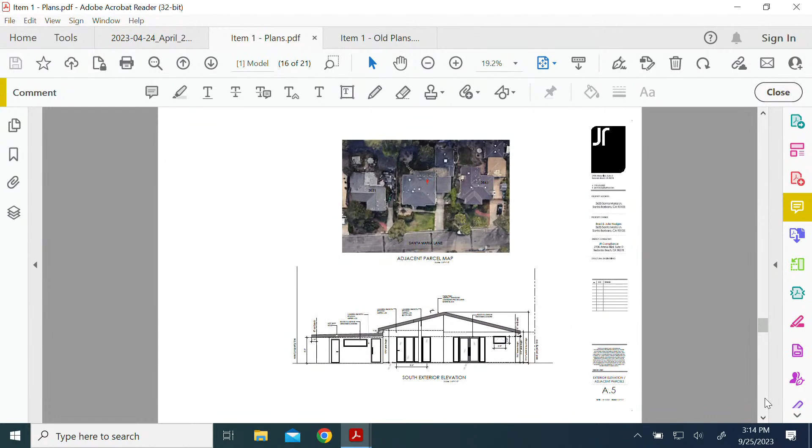And then we also cleaned up the windows on both west and east projections. I think we removed one window and lined them up a little bit better on the east elevation. And on the west elevation, there was 5 thin windows all right next to each other. In the initial design, we changed it to those 2 windows that you see now. That other window is the window across the front, that's the return of your front entry, just up to the left of the entry. That's the window over on this side right here.

So that's basically, oh, and then the projections, so here's how it projects out in the neighborhood. The 2 neighbors on each side are 4:12 roof pitches. Our roof pitch is 3:12. So our plate heights are a little higher, but it's sort of offset a bit by the lower pitch.

Now I can't read it. She may have put in there estimated what the crest is, or the peak of the roof. But it's within a foot, I think, of either house on the right, maybe a foot and a half. I can't really read it from here. Is it possible to zoom in? Up at the top, there's a...

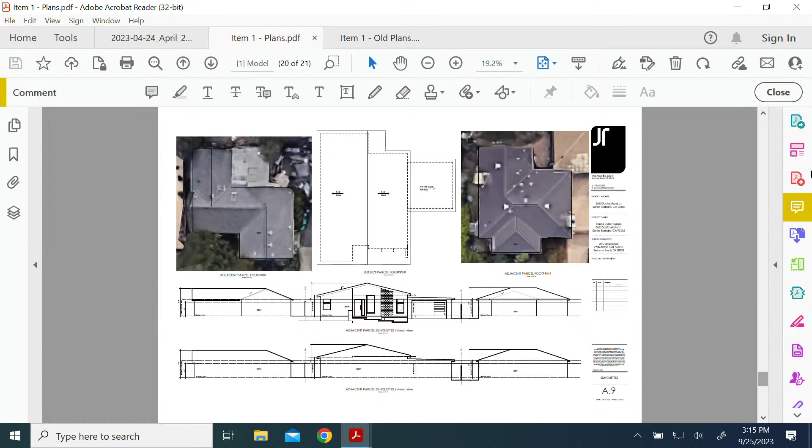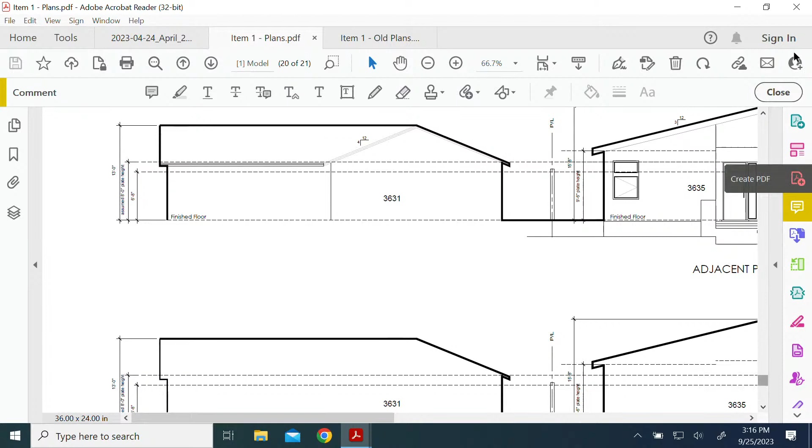Let's see, that's 15.5. Our ridge line is 15.5. And the neighbors, she's got it at 13.7, no, 12, 13 feet. So we're about, and it's based on the assumed 8 feet ceiling or plate height for the neighbors. We just assumed that the plate height was 8 feet on those houses.

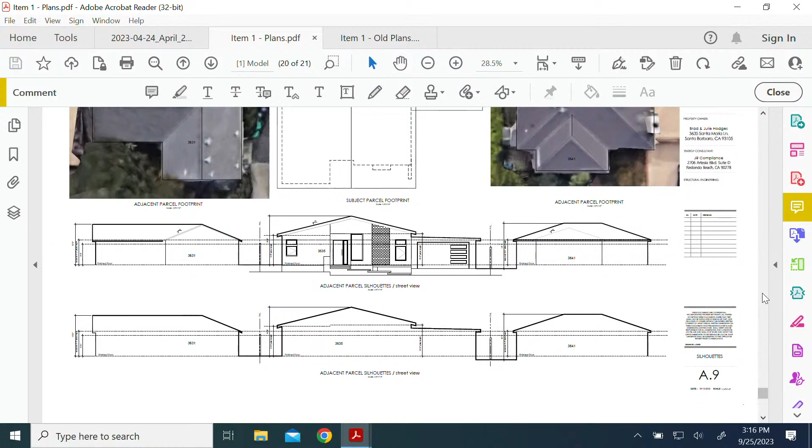Okay. So, and now some other differences, I don't know if it matters, but we did do one other little thing, which was we knocked a notch out of the back corner of this garage to accommodate the AC condenser and kept it 6 feet back, which gave us our acoustical noise levels to meet the decibel levels at the property line. So that 6 foot, and we chose a unit, and that 6 foot just put us right at the, whatever it was, I think 53 or 52.

Okay, other than that, that's about the only changes. We changed the stucco color. Oh, yeah, and here's we put the stucco color in there, but it doesn't present like this, so this is the more accurate. I call it like a dirty oatmeal, or it's more white. The other one was called Dove Gray, but it was a very white with a hint of blue, I think, maybe blue gray. And what is this color, do you know?

Do you know what this color name is, or is it documented in the drawings? It's documented in the drawings. It's La Habra Aspen, X23 Aspen. But that's called out right down here in the plan. Okay, and I believe that's it.

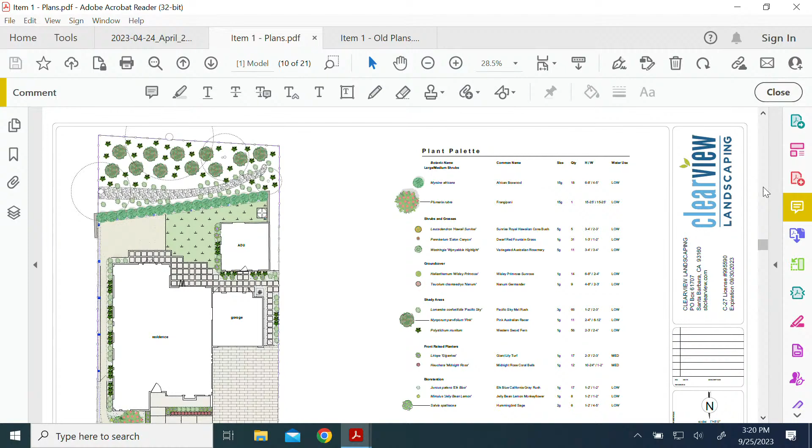Is it on the other page? It's on there, yeah. Gina called it out on there, one of those pages. There we go. I can't read it, but looks like there's a note there on the right, maybe.

GraniteCrete, there you go. GraniteCrete permeable paving. So anything that's not that permeable paver is gravel.

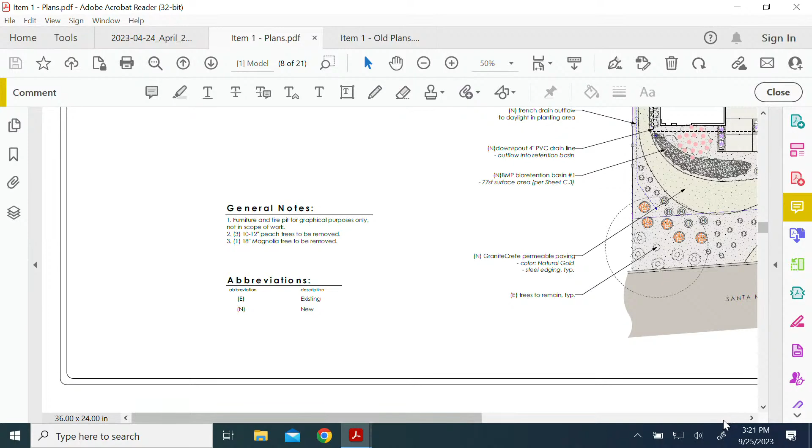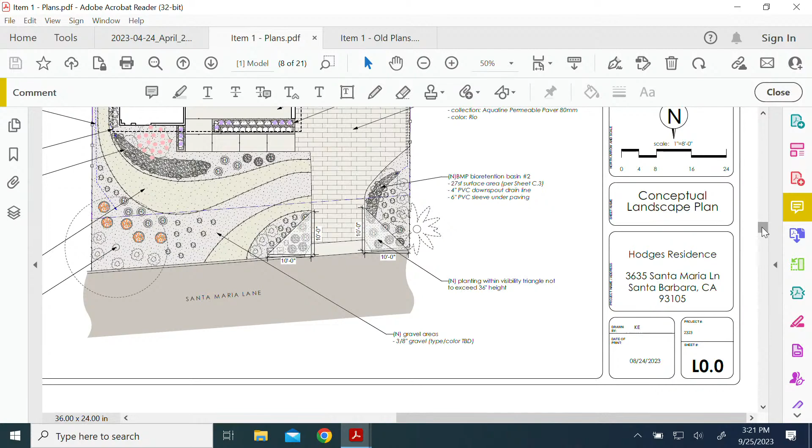There's also a large magnolia in the back, right about here. You can see the slope back here, this is a fairly large slope, and it's covered with one very large, very healthy native oak. It shades a lot, throws a lot of shade under this backyard, and that poor magnolia just never did very well. It's kind of sparsely limbed and doesn't look like a typical magnolia at all. So that comes out.

There's just a simple seating area in the back. This is all that granitecrete again.

Is there any lighting proposed in the exterior landscape? No, not at this time. There's going to be a light in the front somewhere, but we haven't spec'd anything out, we haven't placed it. I'm guessing it'll be somewhere in the front. There will be at least one light, maybe 2 lights to balance out on one side or the other of this front pseudo fireplace projection thing. We were told that we can identify those in building, so I don't know.

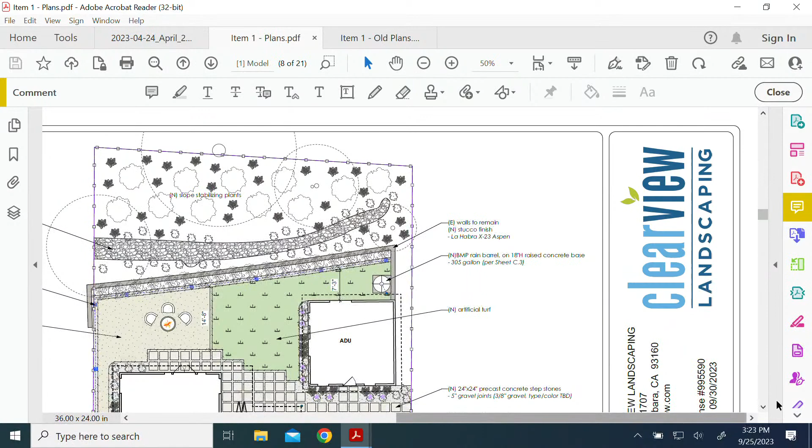I think I don't have anything to, I can't think of anything. I'm sure there's something we changed and I just don't remember it. It's been a while since we've been in here.

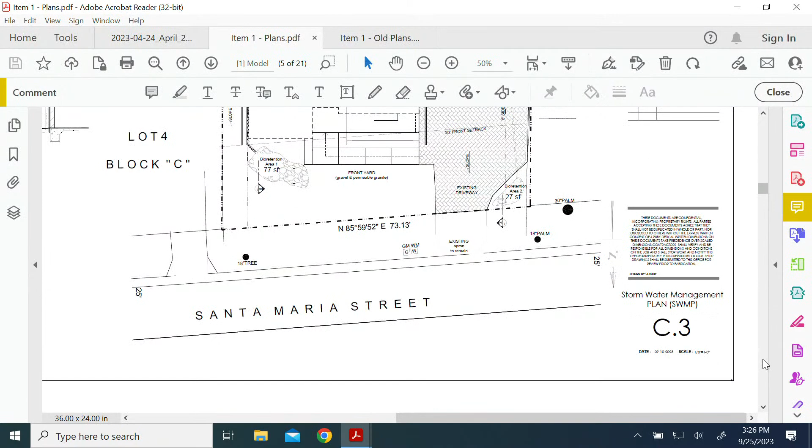They're different because we shifted the center line. The original elevation actually was the page I wanted you to find. It has to do with keeping the original footprint of the house and where the beam goes. The addition has a different plate height, while the existing finished floor keeps the same plate height it is now. We kept the footprint of the house, so we're building on the footprint, and that's where the beam is.

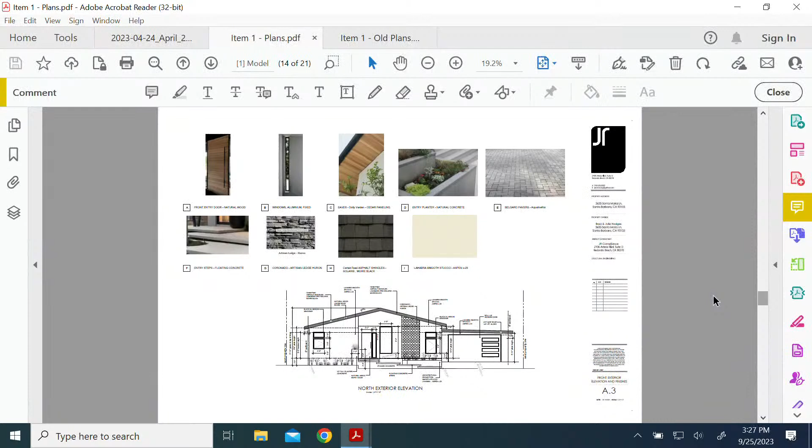But the reason they are different—actually, can you zoom in on that elevation? It's hard to read the numbers. That's what I wanted to see.

Yeah, that's good, the roof. So it's 10 feet on the west and 9.6 on the east—I think she doesn't call them out too well. If you look at the dashed line indicating the finished floor, it's the same all the way through the house. So it's the fact that the ridge line is off-center. Oh, is that why? Yeah. So the ridge line was shifted to the right to line up better with the interior floor plan, and that brought up the right side as the ridge line shifted. I think the old ridge line was roughly at the edge of the door.

And then the other question I had, just out of curiosity, was why you raised the header on the window to the right of the front door. It just looked a little weak when it was lined up—a little underwhelming on the front elevation. We were trying to tone it down, and that toned it down too much. And when we looked at the interior modeling, it was just a better look. It made this part of the house a little more dramatic for us.

Thank you, that's it. Okay, anybody else with any questions? I have some questions. Okay, hi Ms. Anderson, thank you for coming back.

I reviewed where we were at the last couple of times, and I think there was a comment on the roof lines. Our biggest challenge is neighborhood compatibility with your project, which I believe is mid-century modern, is that correct? Okay, right. We're in an existing single-story ranch neighborhood, and your immediate neighborhood is single-story with a lot of hip roofs. So our challenge is finding that this project is compatible with the existing neighborhood and how the character changes. We asked you to look at different roof slopes, potential hips or roof lines. Were there any further studies on the roof lines from the previous submittals?

No, well, we changed it drastically, if you recall the first one. Yeah, the first one was really wild—more of a flat roof with a pitch in the middle. So we completely changed that to accommodate and be more compatible with the neighborhood. We feel that's very compatible now.

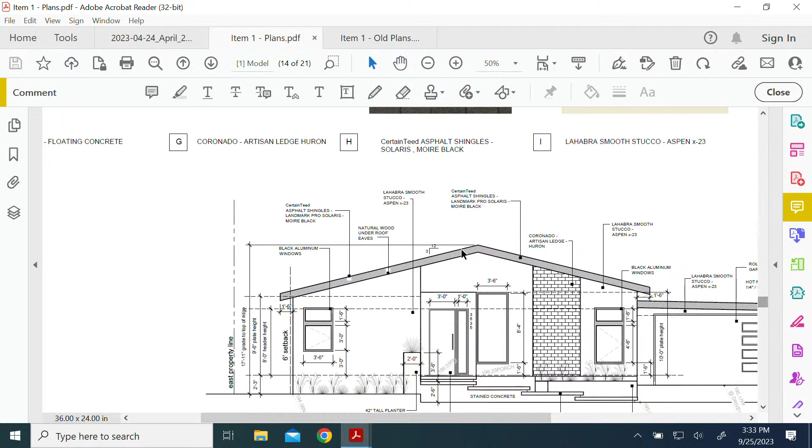The fascias and window trim will be standard black, the Fleetwood black color, matching the window trim. We're going to match that to the fascia pieces, which are metal. Then there's the stucco color, but we could do a 3D rendering. I don't know if you'd be able to spin it, but we can probably snapshot a couple of our scenes to see what it looks like from a few angles. Yeah, we can do that.

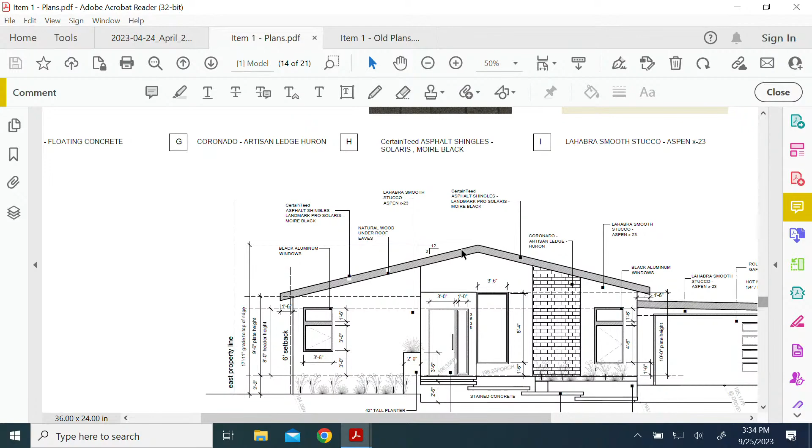Okay, I was just asking—the Coronado ledge stone on the front fireplace, is that a manufactured or a natural stone? That's Coronado stone right now, which is manufactured. It's pretty common, you see it a lot.

We actually have a designer who would really like to upgrade that, but we decided we'd cross that bridge during building if we have to—we could sit down and rethink exactly what we want there. She wants the same material on the inside as the outside, which kind of rules out the Coronado stone, since that's really an exterior product and wouldn't look good inside, although people do it.

We don't have any definite decisions on that yet, so as far as we know it's what we have now. We haven't changed it because we don't have a decision on the interior decoration or design yet. We just have an idea and are working on the inside—we have the major stuff like where the drop ceilings will go, but not the tiles. Interior's really not our purview, so we don't even need to discuss it, just to keep this on track.

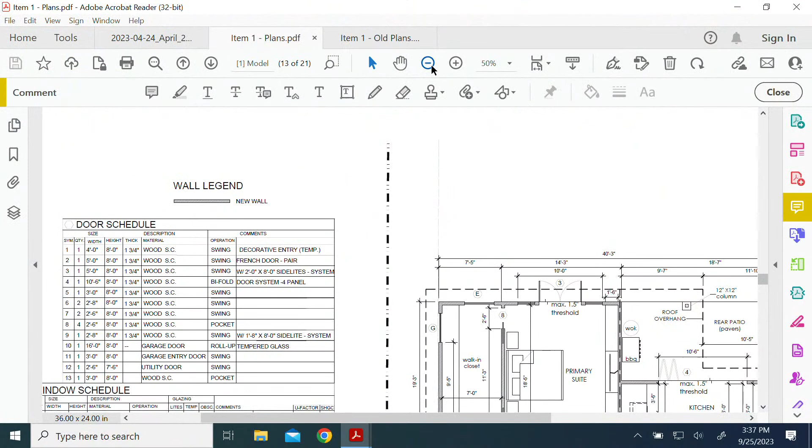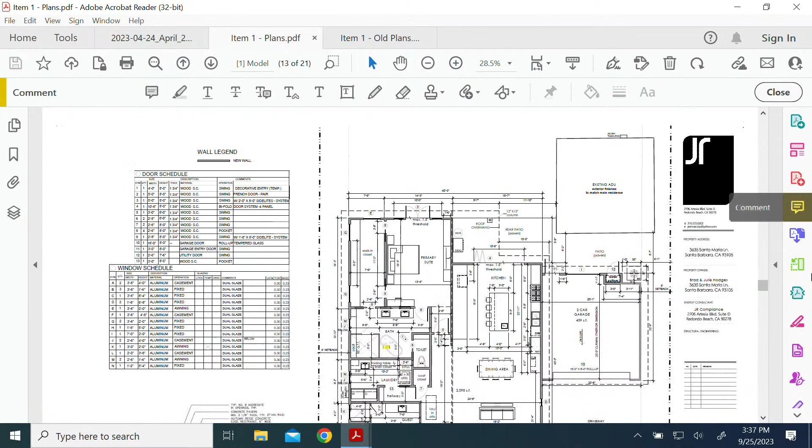I believe the front roof line encroaches in the front 20-foot setback for a certain portion - am I incorrect? It shouldn't, let's see where the setbacks are drawn, typically shown on the site plan. You can see it on the first floor plan - it looks like it covers over the porch, but not the roof line. So the flat work, right? I believe this is a line, right at the corner of the residence. The roof line comes forward of the 20-foot setback. Yeah, it does. Okay, so we don't have that noted anywhere, but okay, thank you.

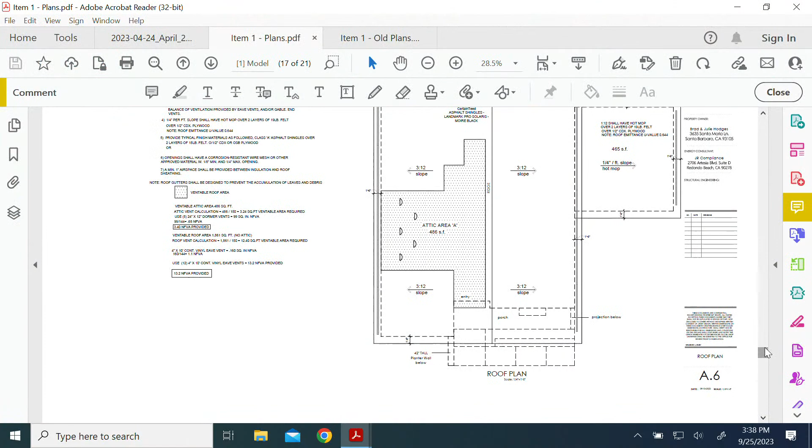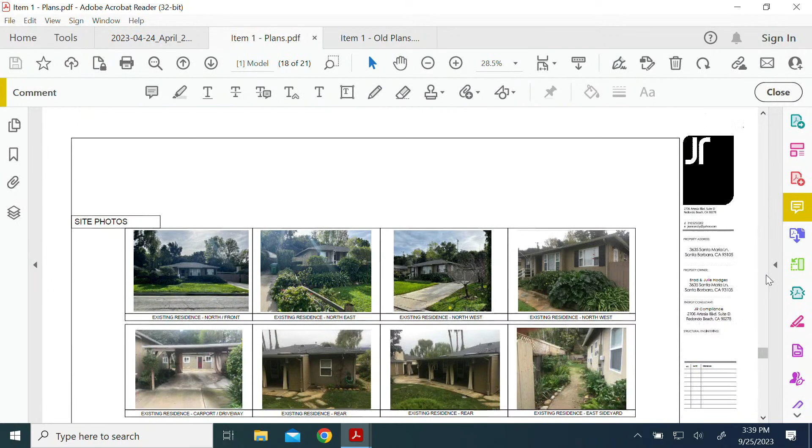Any other questions? I know there was discussion of the varying ridge lines - from my recollection, the neighbor on the west side does have a similar ridge line, so could you pull that up, I want to get clarity on whether there are similar patterns of development. That overhead aerial view might be helpful to start with, then we could go to the elevation photos. It was the one prior that showed an aerial view with 3 houses, including yours. It's on page 16. Oh, right now you're on 18 of 21. There you go.

So the home to the left looks like it has gable roofs, and the one to the right appears to have hipped roofs, and the subject parcel appears to have hipped roofs currently. Does that answer your question? I think I'm more concerned also with the front elevations, the appearance, but it's okay, it answered my question.

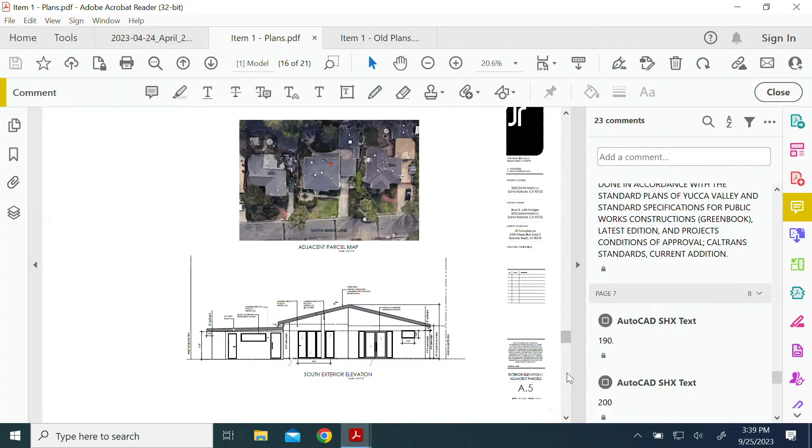Did you guys study at all the fireplace chimney coming past the roof line, or does it just go to the other side? Well, we don't have a real chimney. It's not a real chimney, it's not going to be functioning. It's just one of those electric ones - yeah, it's not a real chimney.

Okay, could we see the front photos, the context photos that you have please? I believe they're below us - those were the ones you were going to a second ago, and I derailed you onto the sheet, I'm sorry. I think if you scroll down to page 18 - there we go, could you zoom in on those? I'm more interested in the neighboring ones.

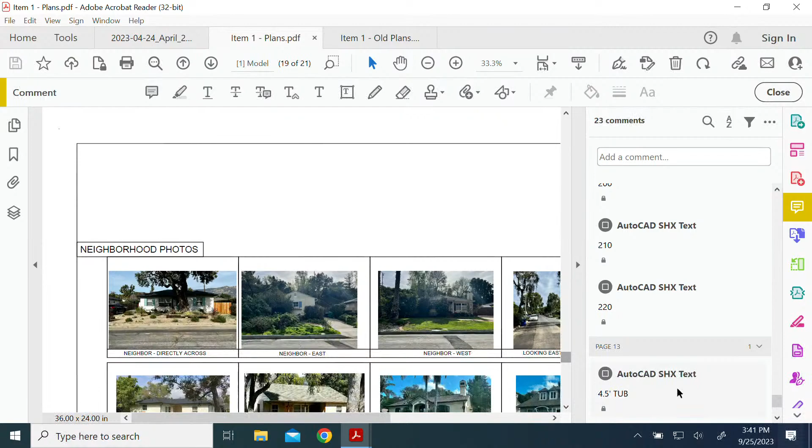If you close the comment bar on the right, that's great, thank you. And then could you point out which two are your flanking neighbors please? This is the east side neighbor. Okay, this is the west neighbor. And the east neighbor, they're working on the landscaping, so they cleared out a lot of the front, and they said they're going to really clean it up so more of the house will show.

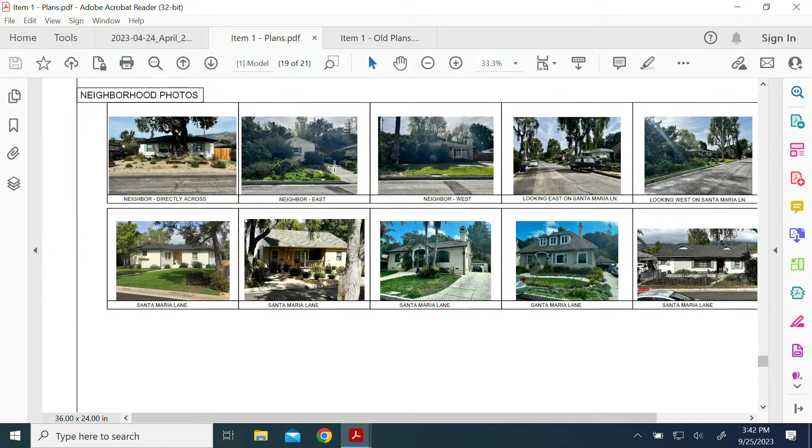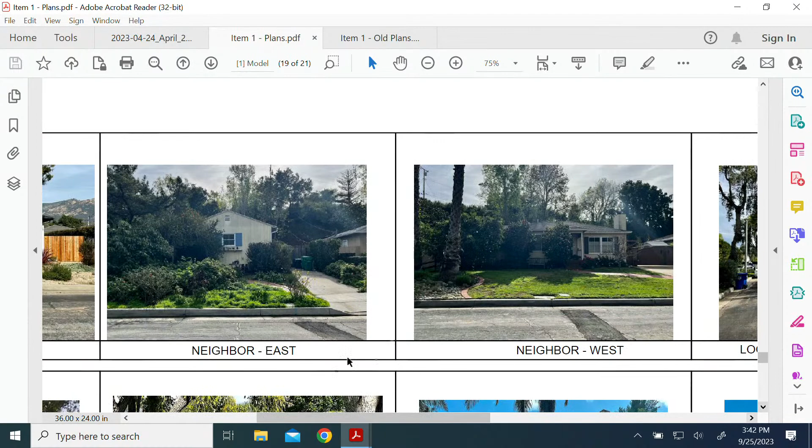And the colors of those homes, from what I'm seeing, it looks like the easterly neighbor's maybe a light gray, and the westerly neighbor has a touch of green in it. And the east neighbor, I think it's more like a light beige. Let's see if we can zoom in a little - well it looks like it might be a gray, like a taupe color, almost like black shutters.

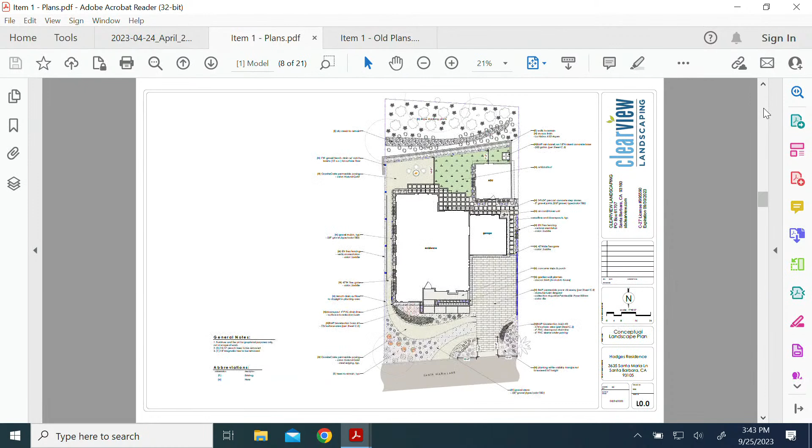That was the only significant question that I have. Except you did note that there used to be a large magnolia tree suffering in the back - has that been removed? No, we're going to apply to get it removed. Okay, and is that illustrated on the landscape plan? Because when I saw it, I didn't see anything indicating the removal of a tree, but maybe I wasn't looking at the right sheet. I think it's not indicated until you get to the site plan - it's noted on the cover sheet, 18-inch magnolia to be removed. But it's not indicated on the landscape plans? No, because we're assuming it's removed for the new landscape. So you don't have a landscape demolition plan, just a proposed plan? Right, yeah. This is the location of the magnolia.

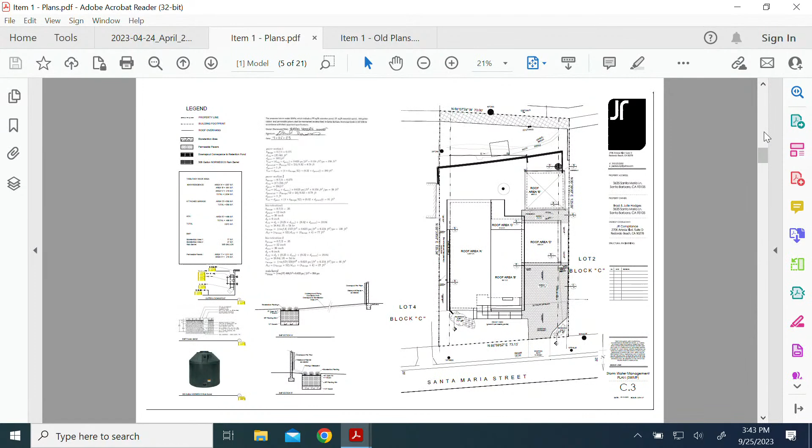And a question for staff: if that's an 18-inch diameter magnolia, would that be required to go through a process for removal because of the size and nature of the tree? Yeah, Chair, board members, because this tree is noted on a site plan, architectural or landscape plan, it can receive its necessary removal approval through this design review process.

It doesn't need further removal or approval through the environmental analyst due to its species. 18-inch trunk like this, is that what the notes say? Yeah, it's notated on the cover sheet site plan.

Have you had an arborist look at that tree? Well, we had an arborist come out to look at the oaks in the back. He briefly commented on the magnolia, just said that's kind of sickly, not like the typical magnolia he sees, but we didn't focus on it at that point. Okay, but you don't have a report from him stating anything about the condition of the tree? No.

I mean, it was an aesthetic call. He said it's not going to die, it's not going to fall over, it's not a risk to anybody. He just said it's a very ugly, healthy tree.

And did I hear you state correctly that the fascia would be metal? Yeah, some sort of steel. I don't know exactly what they call it, but yes, it's gonna be metal to match the window frames. So you're looking at an anodized color, like a dark gunmetal black, steel flat fascia? Flat black, matte black, I think. I don't know what the actual name is.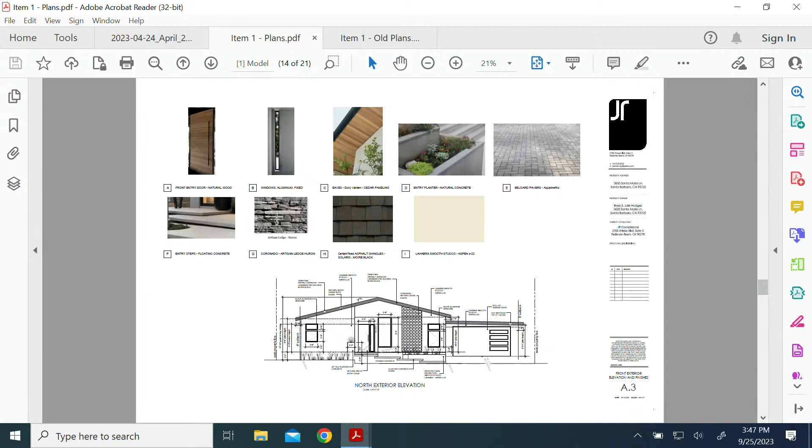Okay, and you've shown us what the manufactured stone would look like. Yeah, this is it right here. In fact, I just realized we changed from the Coronado stone to this Artisan - remember that was a different product. So this is actually the same company, I guess it's a different line, still man-made Coronado stone, just a different one - artisan ledge was the one. We changed it between the second trip here and this trip.

Because the first one, I think we were told that it was too dark - it was like black, charcoal - and you guys wanted more of an earthy tone. So we were trying to find that. Well, yeah, but you're right, the landscape will give a lot of earthy tones too. So what's on the screen right now is representing what your current desire is, is that correct? Right, okay.

And you noted that lighting would be addressed in future iterations of the drawings. Yes. Okay, I think those are all of my questions. Does anybody else have any more questions? Okay, so we'll move on to comment period.

Would anybody like to start? I'll start. I think the improvements are helpful and more in alignment, bringing down the plate heights. Looking at the two neighbors, I get that it's a different roof structure. I think if you go down Santa Maria Lane a little bit more, there's a few more front-facing like this instead of seeing the hip of the roof. I think the adjustments to the windows are better and more in alignment with the neighborhood and starting to not stand out as much. It's definitely a different architectural style, but I think that can be okay.

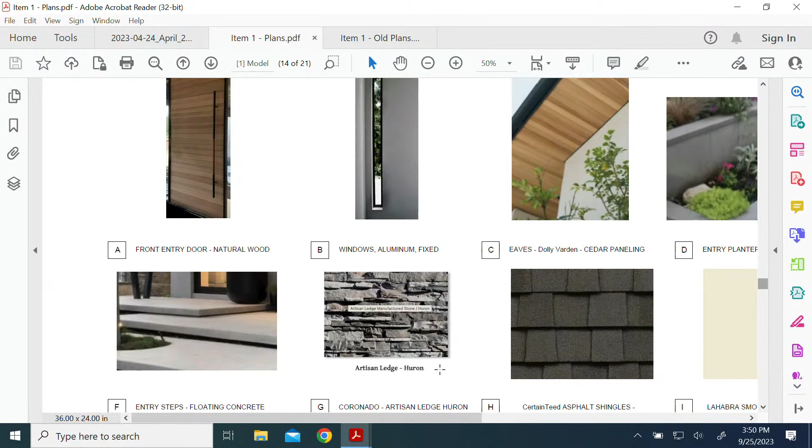Okay, Ms. Sherry, do you have any comments? Yeah, mine's mainly about the plate height. It's not that it's incompatible with the neighbors, it's just the highest plate in the neighborhood. Ten feet is to the base of that molding right there, and when you think about the room size you're in, with a vaulted ceiling, your wall height is basically the top of that wallpaper. I think it's disproportionate, but it's your house, and I don't think it's enough of an incompatibility to make you change it, if that's what you want. It's not what I would do, but I would still bring it down to like a 9-foot plate—when you have a vaulted ceiling, it's more in keeping with the overall proportion, given that you want a gable roof on the front.

So what's happening with that front window, the big front window—the reason it looked funny when you kept the header down lower is because you've chosen a plate height so high, and if you do a header at a standard height, you're going to get a massive amount of plaster above it. That's why you raised the window. You have an 8-foot header, and you're raising that other window to the right of the front door even higher, because an 8-foot header looks disproportionate to the wall height you've selected. So that's why you're getting that incongruency with the amount of plaster above those windows—that's what's forcing all those windows higher. Just so you know, in case you didn't realize it. If that's what you want, to me it looks funny, a little odd, but it's not enough for me to not approve the project.

Just to let you know, we're working with an architect, and there's a drop ceiling at the entrance, but that's interior. That's okay—this is the outside, and I'm just speaking above the front door. Our purview is the outside, and I'm just telling you what's driving your decisions: that header height being high is a result of your decision to make the wall height that high, and that's why that's coming up. I'd also watch your gauge on your fascia if you're doing it in metal, because if you don't have enough gauge appropriate for it, you're going to get a wavy look and it won't look good. The contractor doing this work has done this before—we've seen examples of how he's recommended to do it, and it's very stout. Those are my comments, sorry.

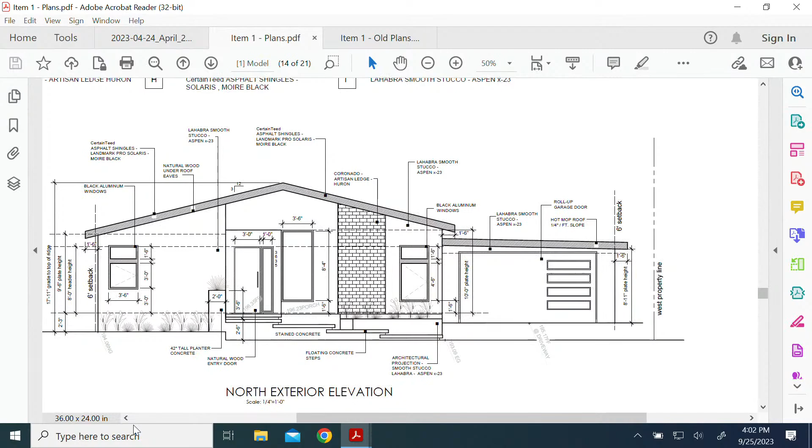Okay, so maybe we could take a quick straw vote here. Who thinks that we could move this on for PDA if we conditioned it today? Okay, so would anybody care to take a first stab at a motion for PDA and enumerate conditions?

I should ask the applicant, so we can do that for you. We can say we're going to give you PDA today with conditions that you will need to meet for final. Those conditions will be at our discretion. Or we can continue you indefinitely to return to us with comments that would be, in theory, related to the conditions we would otherwise be placing on the project. So I'd like to ask you what you would prefer as applicants.

I think we prefer the contingencies or the conditions. I think the easiest thing is to lower the plate heights. In fact, there's just a couple of other options - we can look at the steps, the elevation.

Okay, so we will place the conditions on the project. I'm asking you whether you would prefer to be continued today or for us to make a determination with conditions. Determination with conditions. Okay, thank you very much.

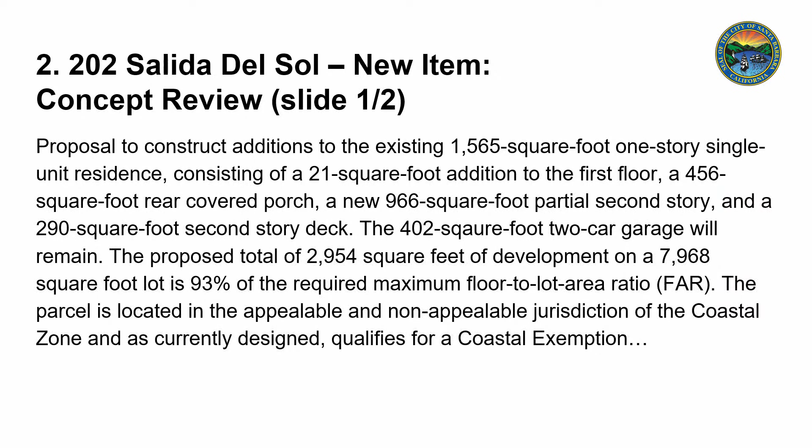The parcel is located in the appealable and non-appealable jurisdiction of the coastal zone, and as currently designed qualifies for a coastal exemption. No final appealable decision may take place at this hearing. Neighborhood preservation findings will be required when you come before us for project design approval.

So if you would please introduce yourself and walk us through your project, we would be very appreciative.

Hello, I am Jason Grant with J. Grant Design Studio. On this opening sheet here, hopefully you can see it, we are just off of Shoreline, Salida Del Sol. We're the second lot up. The blue that I've shown here represents second stories that are in our general relative area, where you can see other second story houses are already in place, including our neighbor, which is directly right next door to us.

I did the FAR study for the neighborhood, and generally, houses that have been developed to some form or another are in the 80s and 90s. The houses that haven't been touched, which there are quite a few of, are still in the 60s and 70s. So that's the breakdown of the neighborhood. We're going to be at 93%. Our immediate neighbor next to us is at 111, just as a comparison.

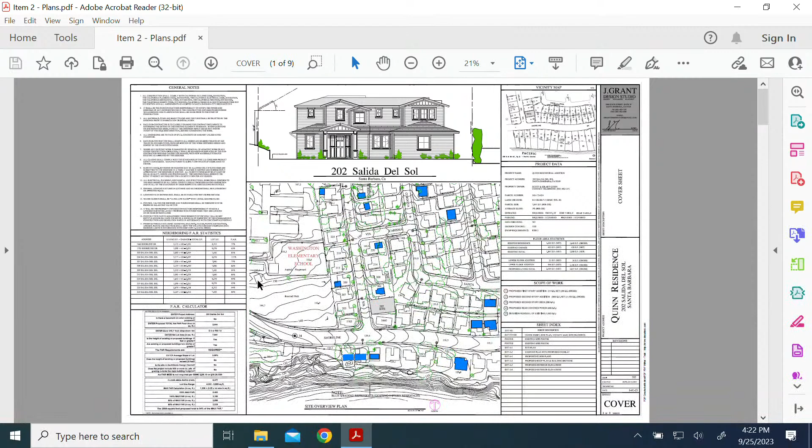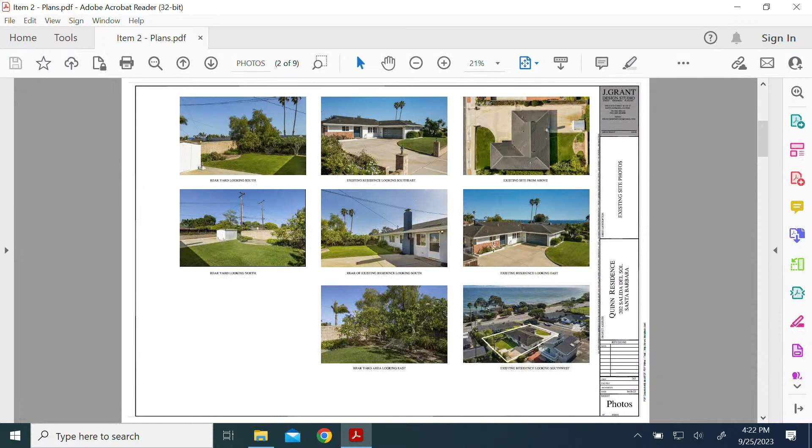So this is our little old house that sits there on the lot today. It's single story, the garage will remain the same, the approach will remain the same. I want to zoom into this photo down here so we can see that a bit better. I think it's important.

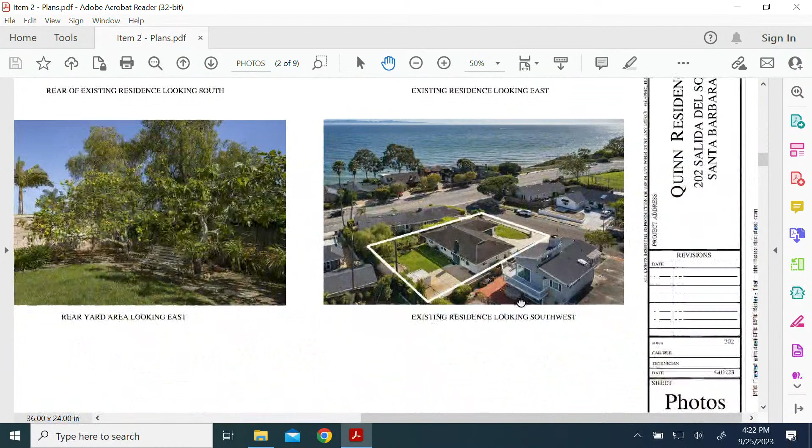This actually describes our neighborhood quite well, this view that's right here. You can see our neighbors across the street, single story, kind of typical. You can see our neighbor down below us, single story, and then of course our neighbor, here we are in our lot, and then our neighbor up above us. The neighbor up above has a second story with a deck that looms down and over the top of us, clearly before architectural review. Our neighbor below is right here, and their private outdoor space is obviously right here.

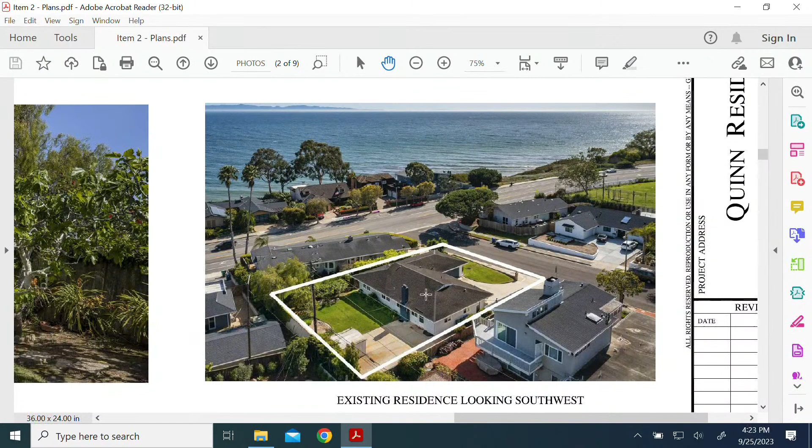So we took critical steps to make sure that we're not looming down or looking in upon them. Our second story addition, we're not pushing out in any way, except for the foyer in the front, so we're not getting any closer to anybody behind us or on the side. Our second story remains stacked, centered up in the middle here. I think this is a good representation to see what the neighborhood looks like and what our impact will be to the most immediate neighbors.

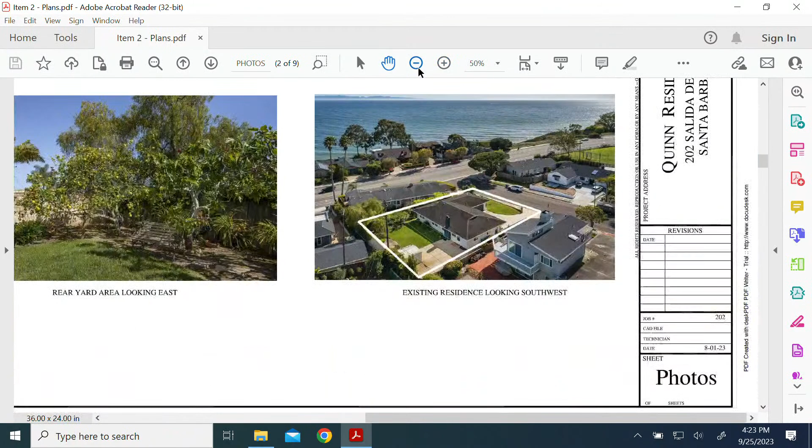Again, another streetscape. So here is our lot, here's our neighbor up above, this is their deck that's right here. One thing to keep in note is that I'd argue their primary view is really more of a southwest view, looking more off at an angle as opposed to looking directly down over the top of us. Clearly they thought so too, because their deck is at a 45-degree angle as well, and that is the best primary view.

Again, here's our neighbor down below us, and they have privacy. We have nice hedging between us, which provides them some privacy. But again, their private outdoor space is right there.

Let's see if any of these other photos show our backyard again. We're not pushing into our backyard at all, we're not getting any closer to any rear neighbors—it's essentially a second story going up. You can see the yard space that we have, and that yard space will remain.

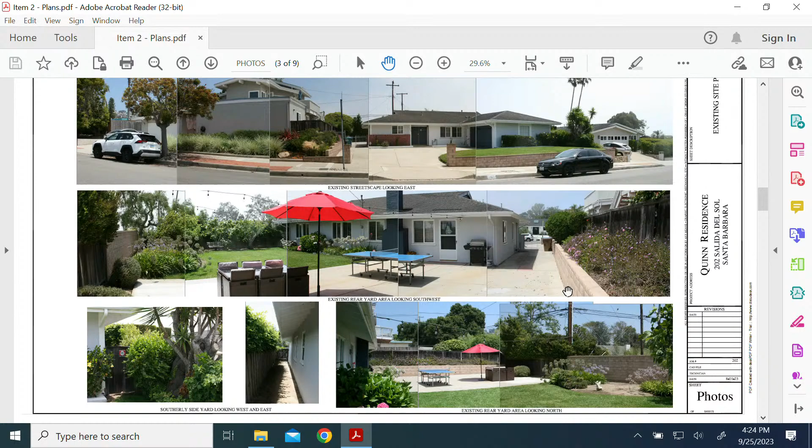Where this concrete patio is right now, we're proposing a covered outdoor space, and to give you a visual of where that will occur, it's right here. It will be lined up with the house, and we're not pushing any closer to any neighbors. I believe the neighbor above thought we were putting a barbecue over in this area—you'll hear some comments to that effect, but that's just not the case. It will be lined up with the house, not getting any closer to any of the neighbors.

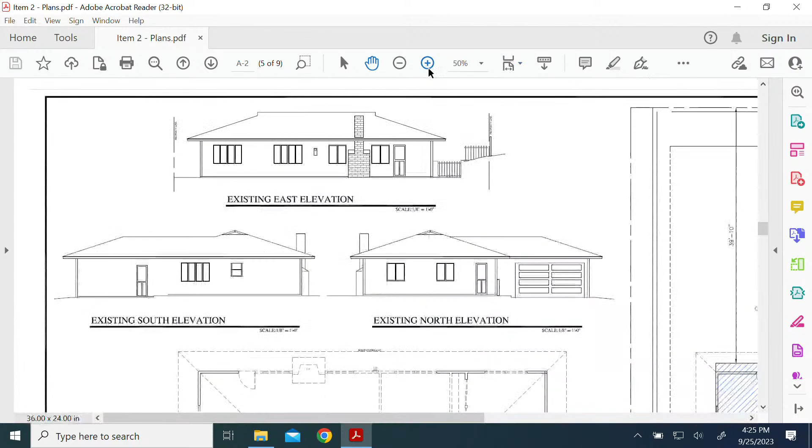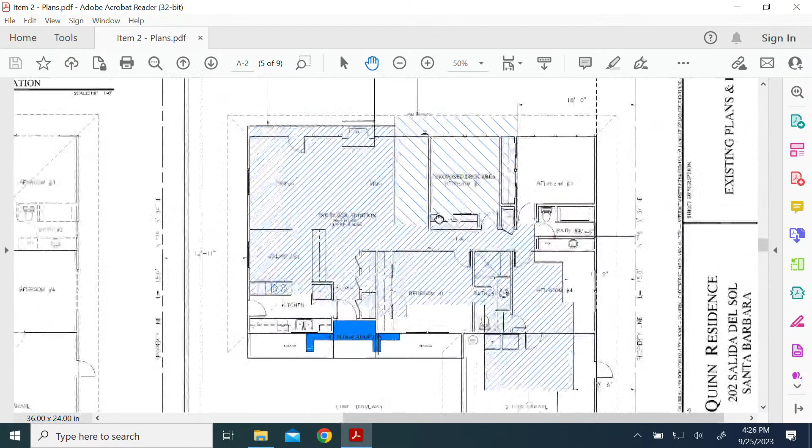On this side, we already have a pretty good separation from our uphill neighbor—we're at 14.11 and not getting any closer. This represents our outdoor deck, and we're maintaining 18 feet, burying it in the center of the whole property, not looming over or on top of anybody. We're 18 feet away from the property line and 38 feet from the rear. I think people have concerns anytime you hear a deck on the second floor—is that going to impede on our privacy? We've made a conscious effort to keep everything very centered and not looming over the top of anybody else.

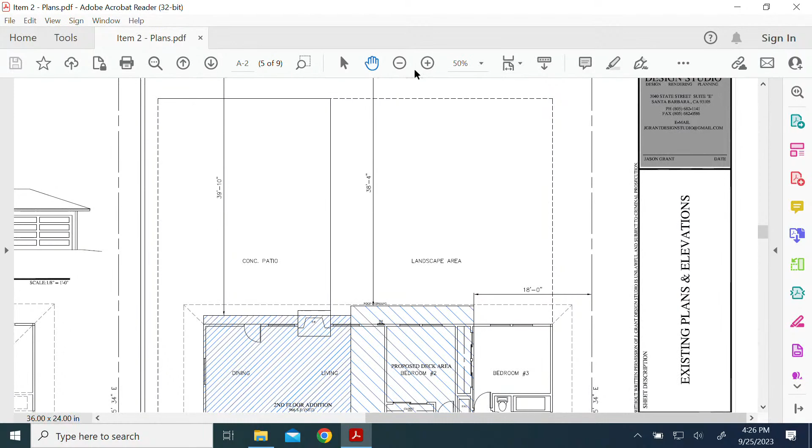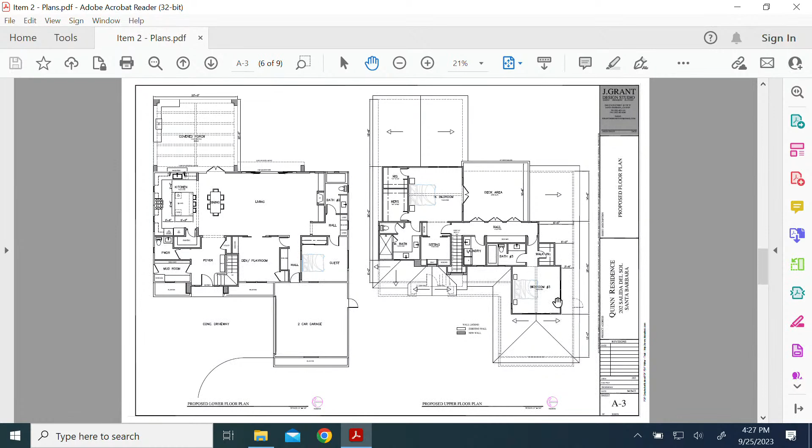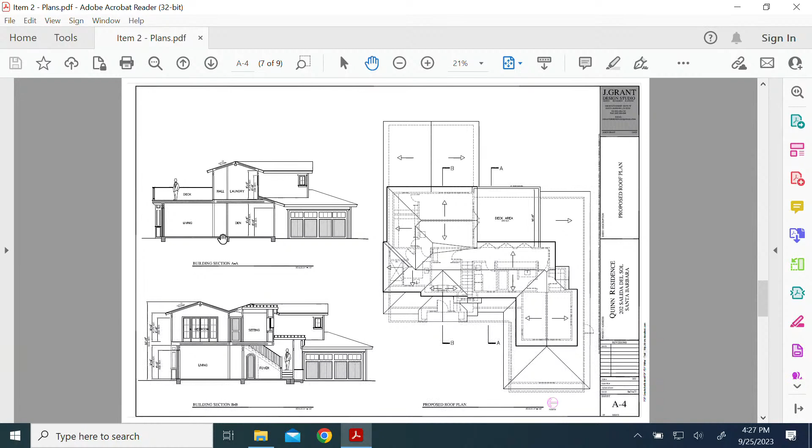Simple sections—plate heights are always a concern. Our first plate is at 9.6 with 8-foot heads, and the second floor is at 6.8 with a 6.8 header and 8.0 plate. So it is getting a little bit taller, but our overall height is only 22.6. We've quite intentionally kept the massing on the second floor very narrow so our roof lines don't get too high, and I think we've accomplished that well.

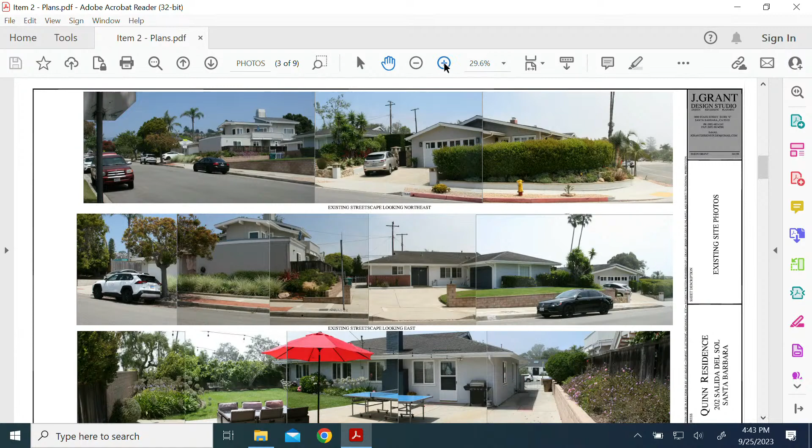This is a great example of what the neighborhood does. Here's that wall, it's 3 feet, plus the grade goes up. Here's our situation, I'll grant you 4 feet or so right there, and then this transitions back into what I assume is nothing. There's a step down, but the aerial I have shows spot elevations of each site as it works its way down. But it's not a survey. So there's kind of that step down, and again a step down.

And you're replacing all the roof with... Correct. Okay, dimensional shingle, asphalt shingle or something? A high-quality asphalt shingle, something with a bit more profile to it, but it'll be something nice. And I didn't see a slope on your roof plan. I think it's 4 and 12, it's on the section if I remember correctly. Okay, 4 and 12, thank you.

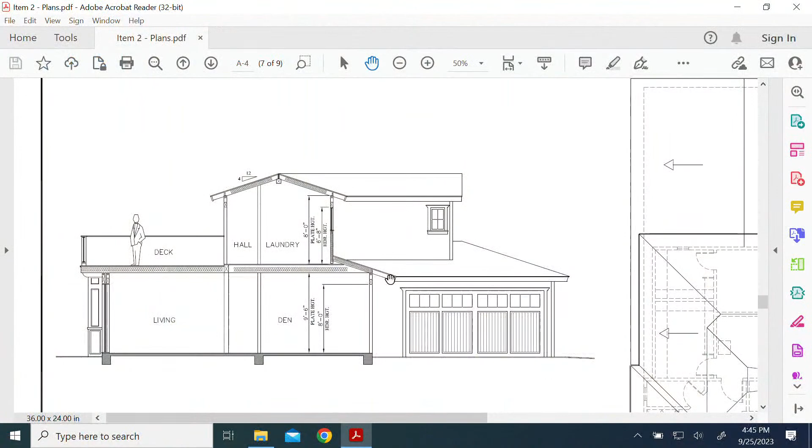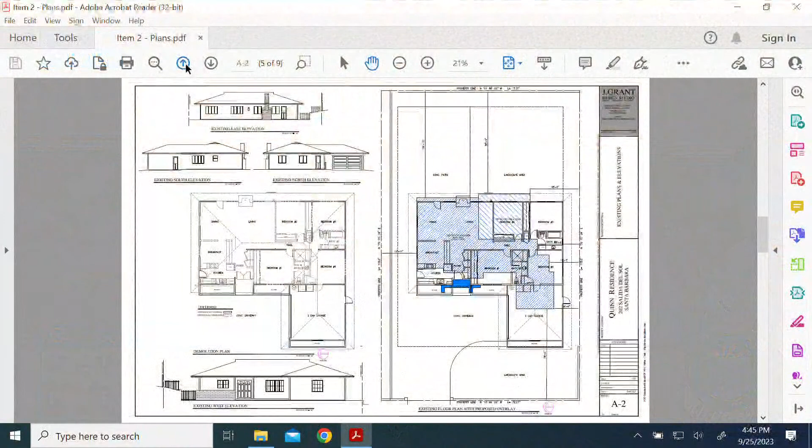And then the only bedroom 3 window, but you stated that was over the driveway. Yeah, exactly right, not necessarily a concern for privacy. So that window, if the addition was here, it's kind of this direction. This is their driveway. And this is where we made sure not to put any windows or layer over the top of that space. So yes, that window is right there, looking this direction.

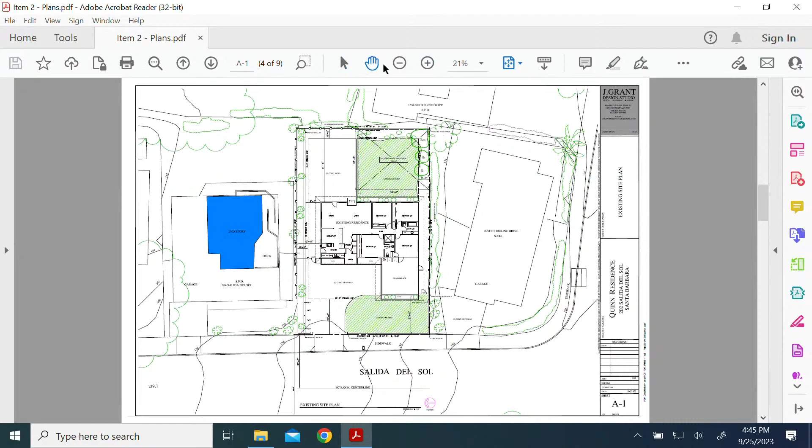And then the master bedroom windows are set so far back, 40 feet. Exactly right, we're all the way on the opposite side essentially. So those master bedroom windows are here. But Paul, who got up and spoke, he's right, he's living back here, and his concern was related to these windows that are right here. And so we're a good distance away.

The conversation we had today is, what I'd like to try to do is mitigate privacy with some hedging, or a combination of a wall and hedging. I know that's a subject, but something we could agree on. Hedging maintained at 8 feet or whatever the magic number is, where we maintain privacy for him and for us as well. This hedge right here is a blessing in terms of how healthy and wide it is, one of the nicest effects. And this property just doesn't have much landscaping along the perimeter right now, it has a few citrus trees and whatnot.

Particularly against Ann's house, who just spoke, there's really nothing. When I first went there, my first thought was it'd really be nice to have some kind of foliage to separate us from you and vice versa. It's hard, honestly, if somebody's standing at the deck, that's a very tough angle to try to hedge yourself out of. And of course when you have a neighbor up above, especially along the mesa, they're like, don't block my views with your hedging. So it's that balancing act, of course.

I'd love to see some more planting go in here, something that creates a little bit of separation, I think that would be nice. And frankly, because of the location of this deck, it's a big reason why we looked at trellises and other things for that outdoor space, but it's literally right there and on top. When I met with Ann, I thought we had a good meeting - one thing conveyed is that the roof form might actually be a good way to block sound when people are out there. It'll act as a way to make sure you're not staring right down at somebody and hearing everything going on when they're using that outdoor space.

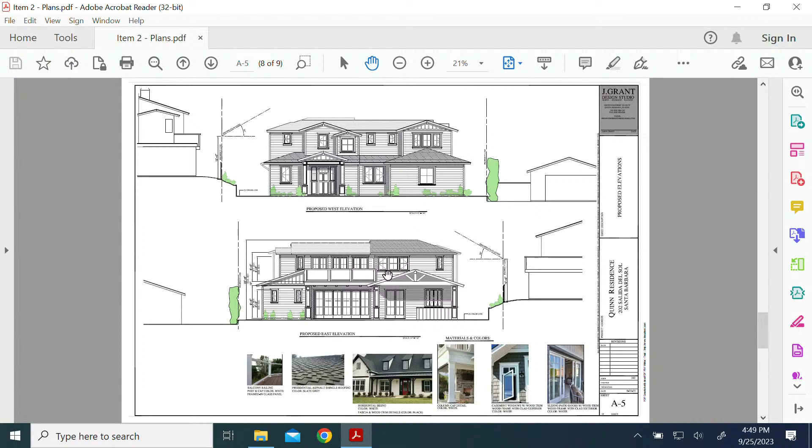I appreciate that. And then you're close to the 15 feet, which we like to see on the interior setback sides on both of your second floors — close. But you didn't bring any 3D perspectives for us. The 2Ds are difficult, because they look a lot more massive than the three-dimensional view would potentially look. So I'd like to see that in your next submittal to help us with the 93 FAR.

So I guess that might be a comment, but that'll finish my questions. Thank you. Chair Kawas, board members, if I can just, on that note, I should have mentioned this earlier, but the applicant is interested in waiving the remaining FAR supplemental requirements, so if you can all take that into consideration, and I can pull those up if there are questions on that.

Okay, and I just want to note for the record that I have not forgotten the question I need to ask staff about the public comment. I was remiss in doing that at the outset of the item, but I have not forgotten, and I will get to that.

Thank you, Ms. Garson.

Okay, anybody else with any questions? Okay, I have a couple questions.